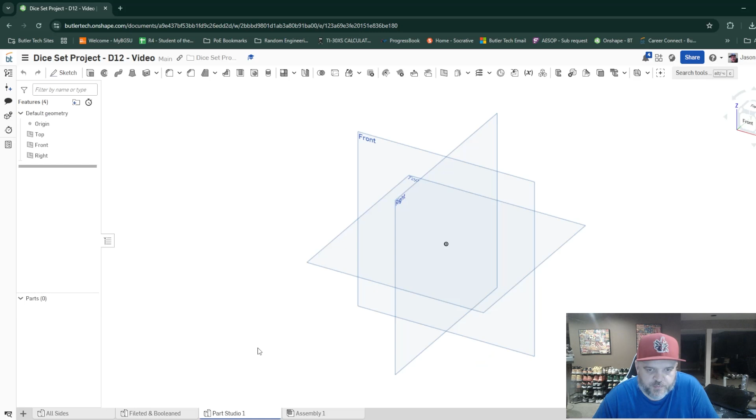So we're going to start, as always, with a new Part Studio tab. I'm going to hide the front and right planes, and we're just going to start with the top. So, as always, start with the sketch on the top. We're going to go with an inscribed polygon around the origin. And again, it was a pentagon, so 5-sided object. We're going to make it 1 inch in diameter.

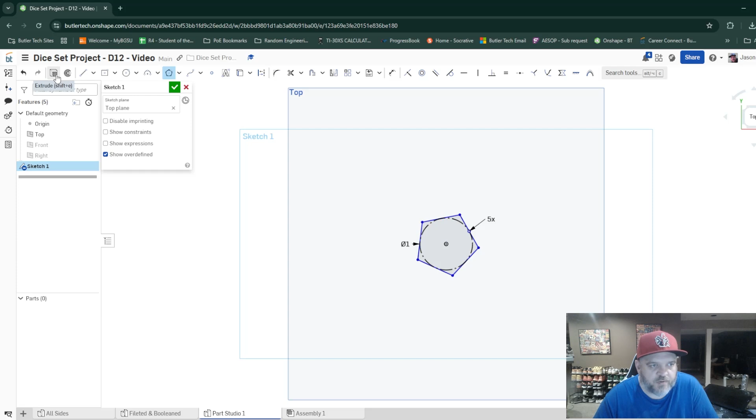And then, now that we've got it sketched, we're going to extrude it with a depth of 0.01 inch. If I rotate it, you can see it's a nice thin piece. And now I'm going to hide my top plane and my origin just to keep this nice and clean.

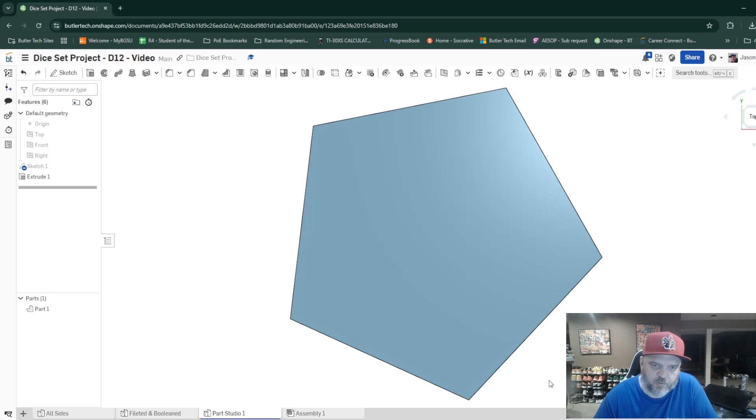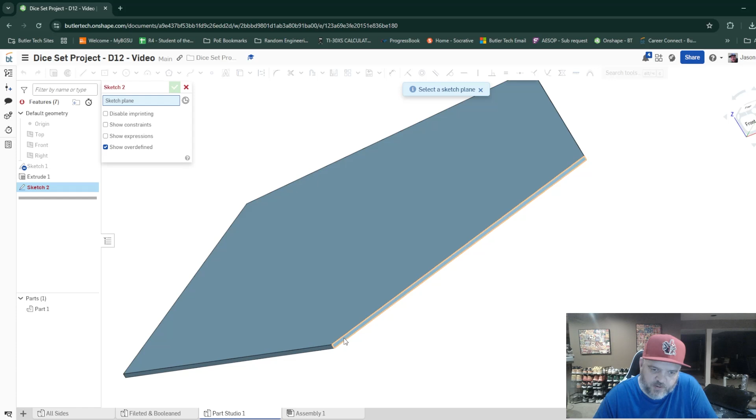So this one's going to be a little bit different than the rest of the dice. We're going to learn a new tool and a new use for an existing tool. So now we're going to create copies of this component, attach it, transform it, and rotate it. Sounds a little confusing, so I'm just going to walk you through how to do this one at a time. So first thing I'm going to do is create a sketch on one of the lips or edges or faces of this pentagon. So right here on this small edge.

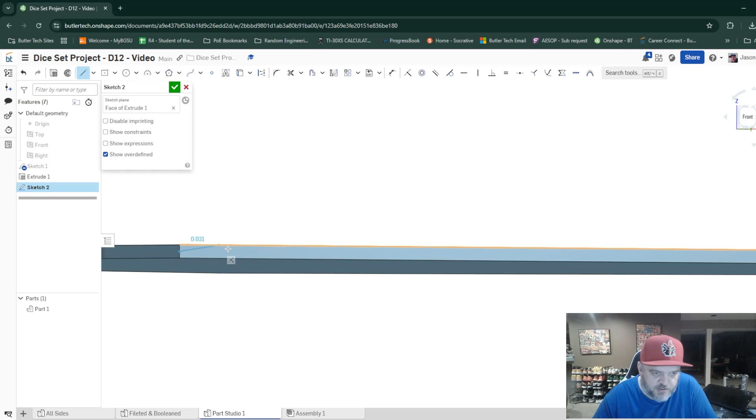I've got the sketch. I'm now going to create a line. So this is going to be a rotational axis, but it's a line. So I'm going to start by grabbing the midpoint of one of these faces. I'll know I'm in the right spot when I zoom in, and it gives me that little box. And I'll zoom out, and then I'll zoom into the far face. Again, as I go up and down the line, I've got 2 endpoints, and when I hit the middle, it

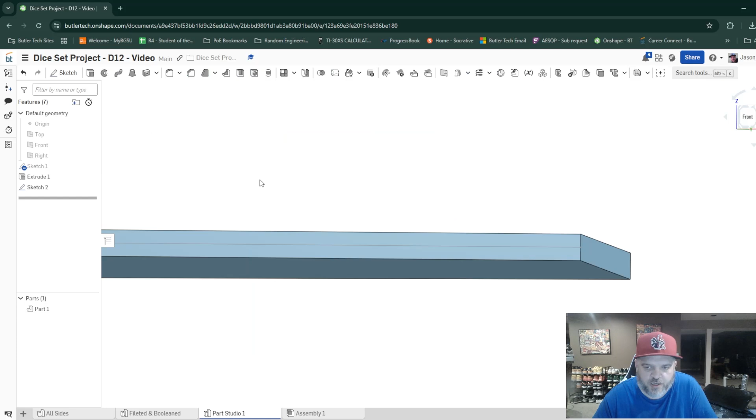gives me that box. It still wants to connect more lines, so I can either right-click and hit Escape, or I can actually just go up here and hit the green check mark on the sketch because I'm done with the sketch at this point. So you see I've got a nice little gray line right there down across that face.

So now we're going to use a new tool for us in this class. We're going to transform. So you can see it's kind of got a rotate in the picture, but if we hover over it, it moves, rotates, copies, or scales a part. It's also done by either the mate connectors, by a line, distance, or even XYZ coordinates. So you can do a lot of different transforming of a part with this function.

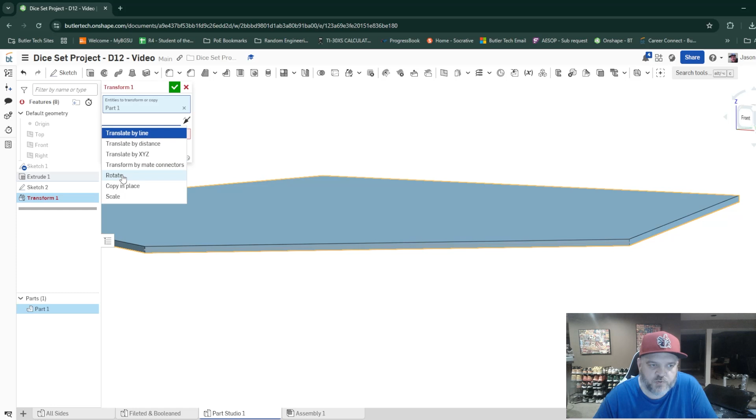So we're going to click on the button. First thing it's asking us is what do we want to either transform or copy. So in this case we're actually doing both, and we're doing it with this whole shape. So we're just going to click on it. It says part 1, perfect. What we're going to do is we're going to rotate. It's asking us what axis are we rotating it about. That is this gray line we just created.

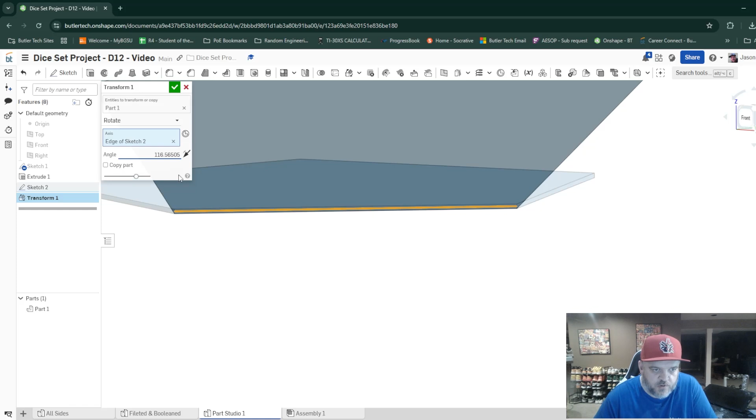Now, you wouldn't know this, but I've already looked this up, and the angle is 116.56505. So we're going to remember that because we're going to use this a bunch. We're also going to copy the part, so we end up with the base and then with the new part that is rotated. So now we'll hit the green check mark.

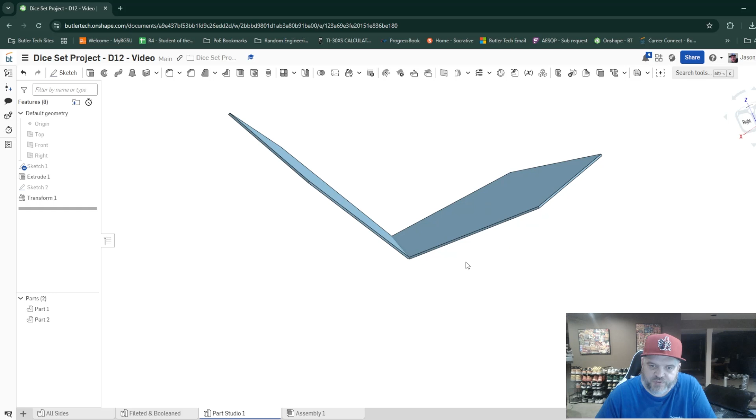We're going to zoom out just to show you what this has done. So this has added a new one of these pentagons at this 116.56505 angle. So now we're just going to continue and repeat this process as we go around the shape.

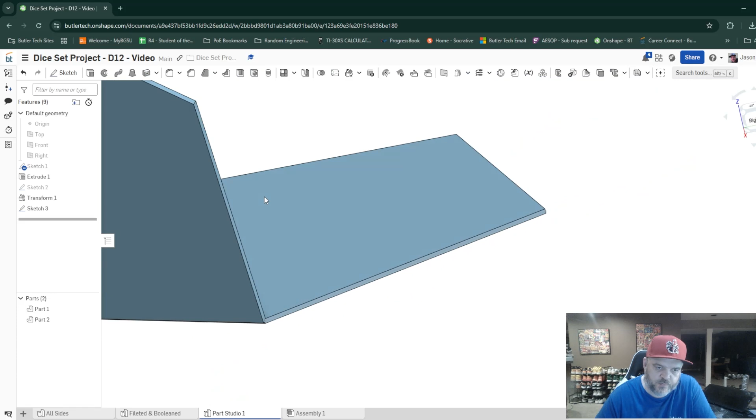So create the sketch, zoom in to make sure we get the lip, draw the line, zoom in to make sure we get the midpoint on that side. Zoom in over here. Going to green check mark it. Then we're going to transform. What are we copying? The whole pentagon. We're going to rotate across that axis we just created.

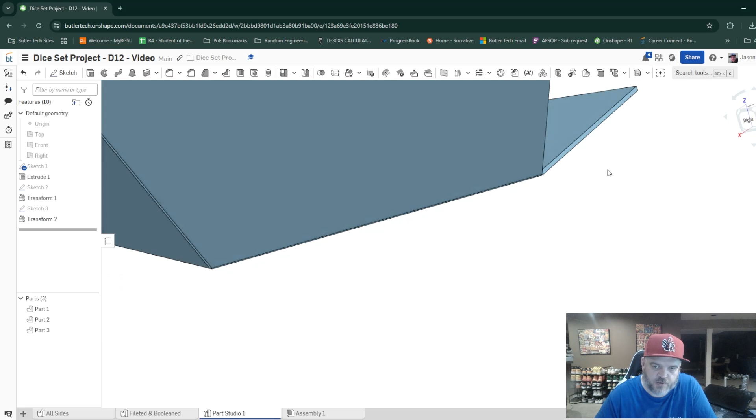116.56505. I'm actually going to copy that because I'm going to end up typing it a bunch. So I just Control C to copy it. Good. That one is now locked in place. Now we're just going to rinse and repeat.

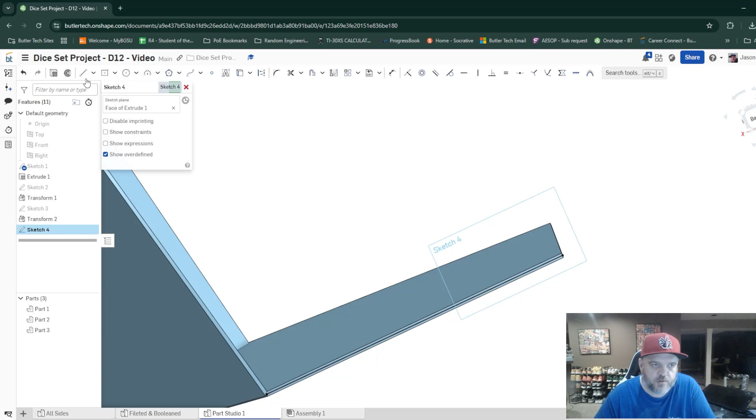Sketch, line, zoom in. There's my line, escape. We're going to rotate. You hit the check mark first, Mr. McDonald, then transform. Entities to copy is that face. Rotate across that axis. We're going to paste in my angle. We're going to copy the part. There we go. Rinse and repeat.

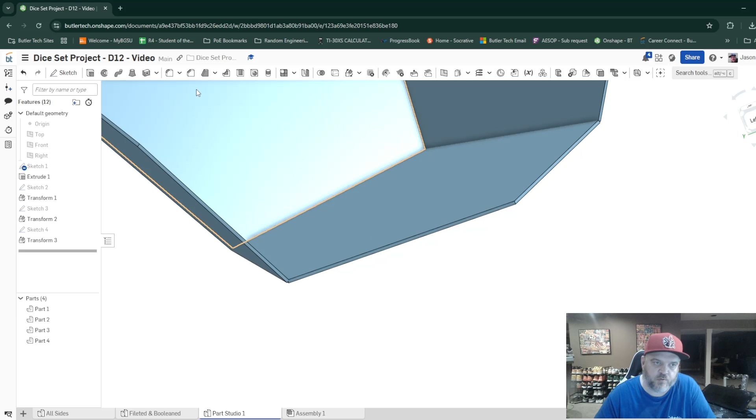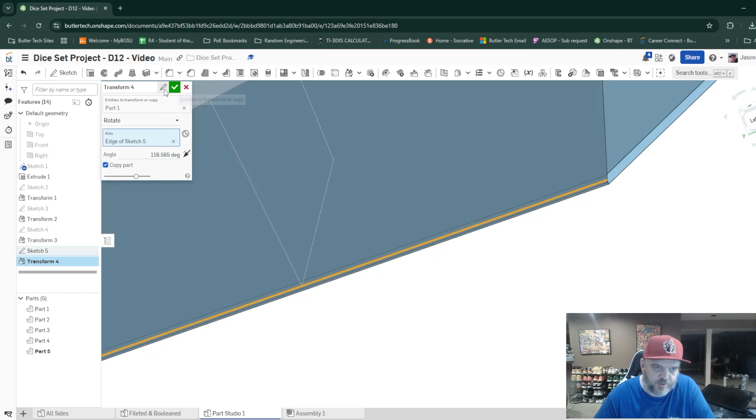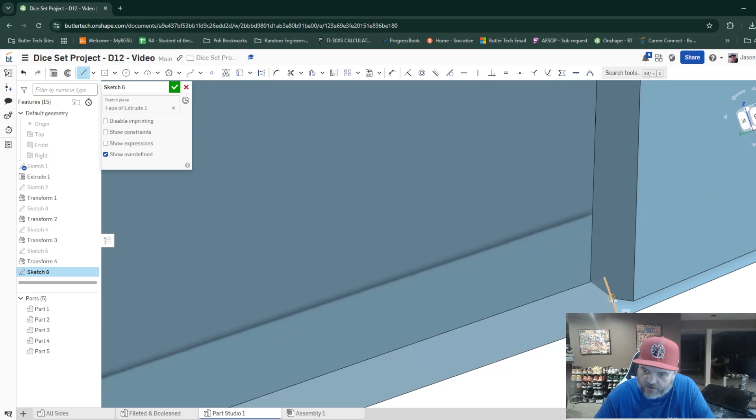Sketch, face, line. Once you're done, transform, rotate, copy part. Alright, we're going to repeat again. Face, line. Oh, somehow I disconnected from that line. There we go. Escape.

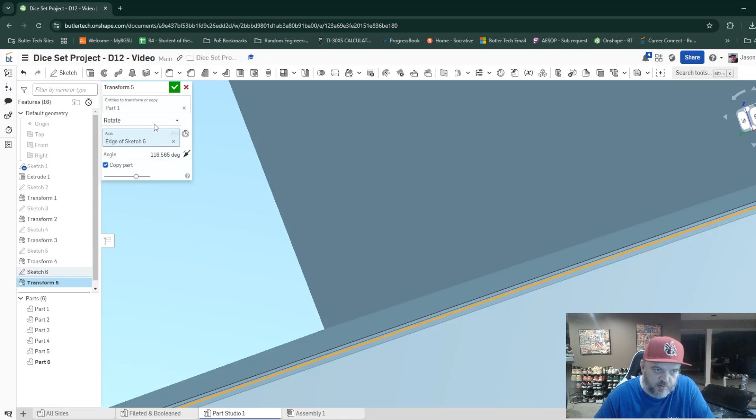Green check mark. We go to transform. That shape. Rotate. Axis over that line. Repeat. Oh. So this will happen occasionally. Occasionally it'll rotate the wrong direction. So just double click on the transform. Hit the opposite direction. And now it's in the right place.

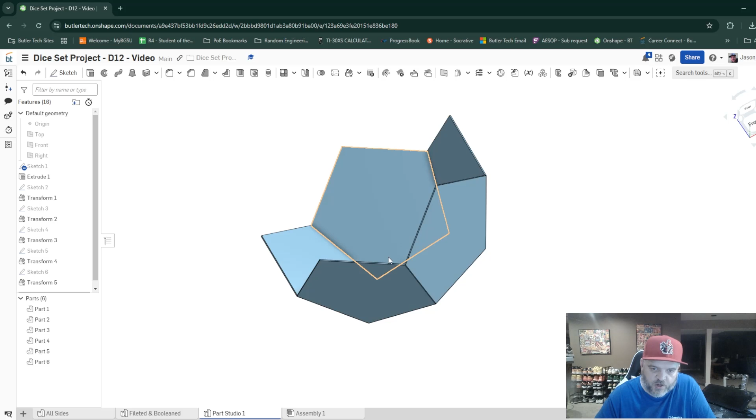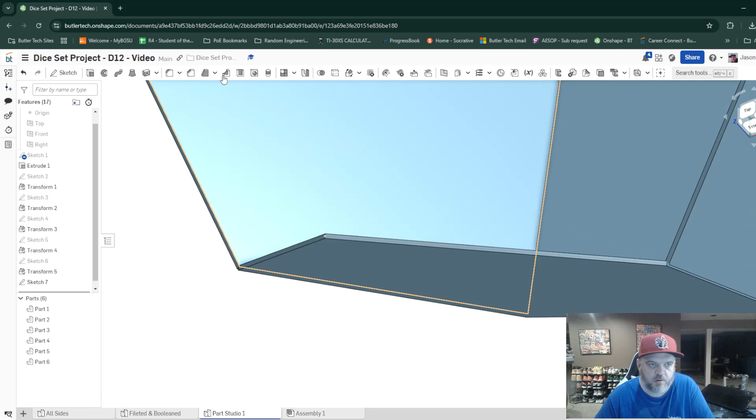Alright. So kind of like a cooking show, I'm going to jump ahead, but you would basically just repeat for all of these, sketching on each of these faces. It doesn't matter which one of these lips you grab here. I'll just do this one to show you that it works. Transform. That one. Rotate the axis, the line I just drew. The angle that I've copied. And so you'll notice it connected basically to two different places.

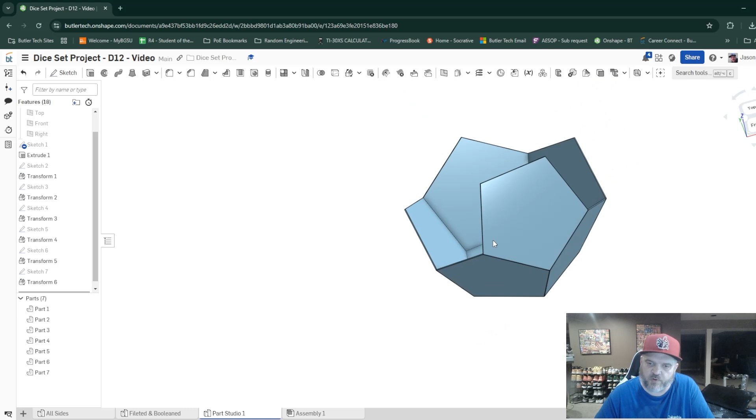So again, gonna move ahead in the recipe instead of drawing the last 5-6 sketches. Once you get to that point, you'll be here. So you'll have all your shapes, they'll be all connected, but you'll notice they're kind of rough around the edges. They're all separate parts, so you'll have your 12 sides, again, dodecahedron, 12-sided. So two things you'll want to do here, just like before, you'll want to fillet all your sides. So fillet, you can click in the middle of each face.

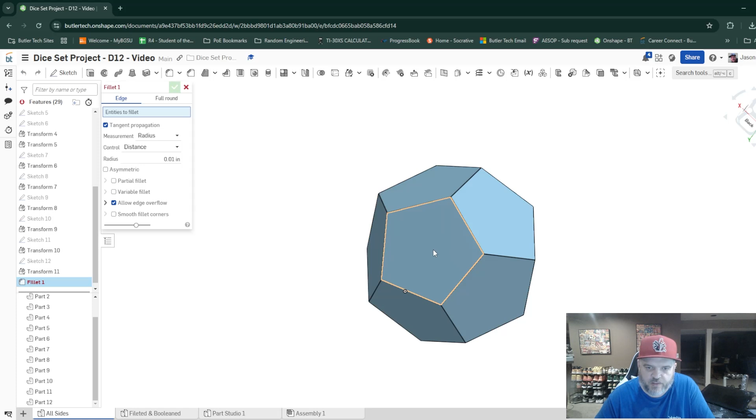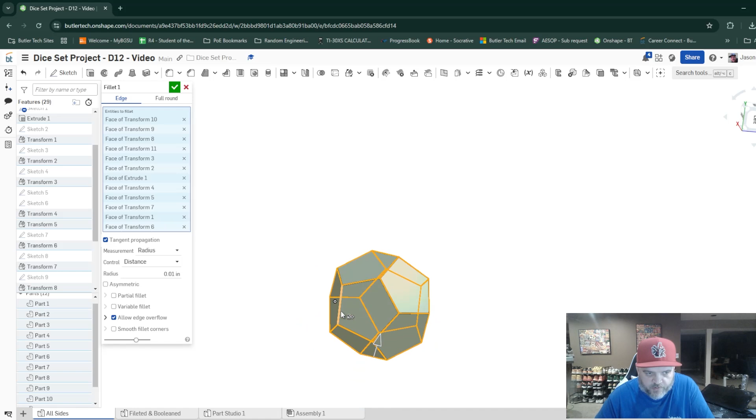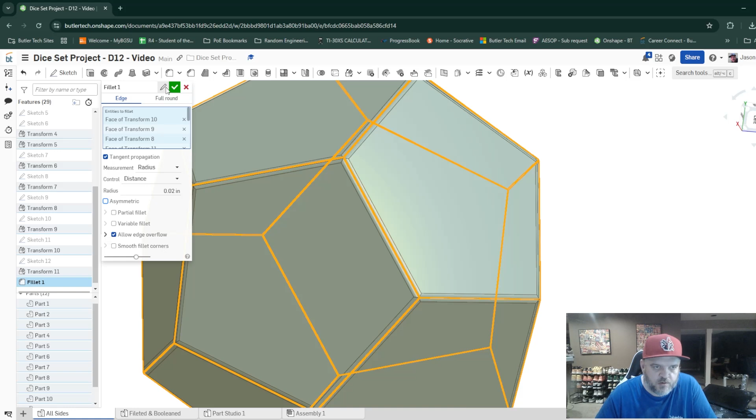Once you've got them all, just kind of rotate around, make sure you're not missing any. There we go. Now if I was to leave this at 0.05 like we've been doing and double check, you'll notice it fillets a little too much and it leaves a gap. You can't boolean that because it's essentially 5 floating parts. So instead, we're going to drop our fillet a little bit. 0.02. Let's see. They're all connected. So let's try to Boolean this.

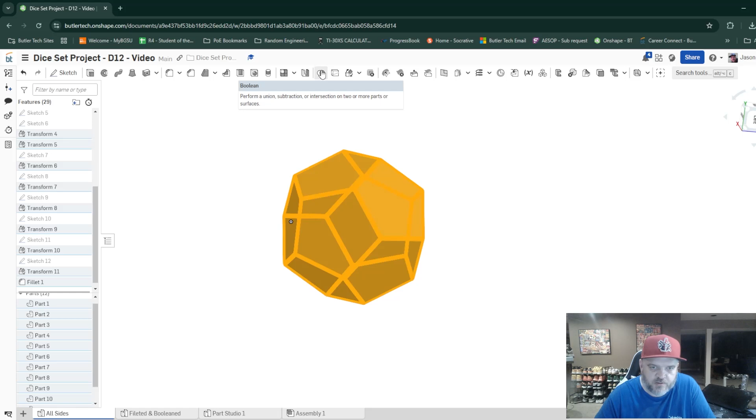So if I just draw a box over all of it by left clicking and drawing a box. And then if I click this one, which is a Boolean, looks like a Venn diagram, it performs a union, a subtraction, or an intersection on them, essentially just like a Venn diagram would. In this case, I'm trying to do a union, but you'll notice it gives me some red spaces here.

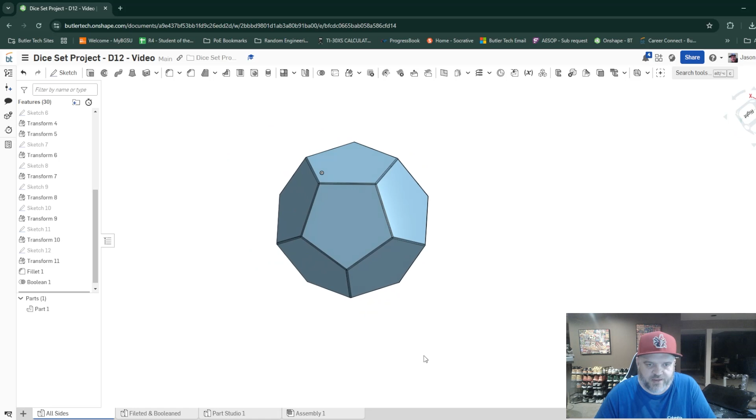So that didn't work. I'm going to go ahead and hit the green check mark, but I'm going to go back into fillet. I'm going to change this to 0.01. Hit my green check mark to make it a little bit better. You'll notice my Boolean's no longer red, and all my parts have now sucked up into one part. So there you go. I've got a perfect dodecahedron with filleted edges of 0.01 inches. So that way they still connect and can form a single part.

So that is the entire filleted and Boolean dodecahedron, which is our D12 dice. So once you've got here, you're just doing like the rest of the dice. You're changing the color by adding appearance. You're editing, you're making sketches and putting your numbers and assigning materials to the dice. So we got you about 90% of the way there, getting you the general shape. So go ahead and keep plugging away on this.